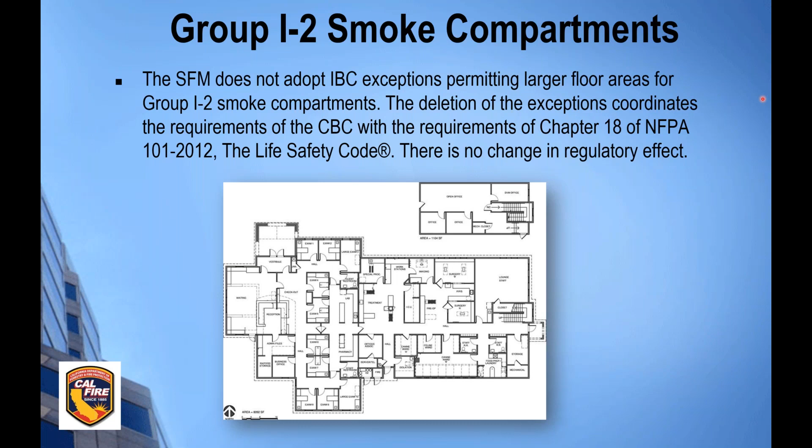There is language in the model code that allows smoke compartments to be larger than what NFPA 101 does and what we do. So we struck out model code language. Again, not new regulations. The smoke compartment sizes shall be not more than 22,500 square feet. So that hasn't changed. What changed was that model code changed it. So we did not adopt that language. We kept our language, 22,500 square feet.

And as you can see underneath the parts that are struck out, you'll see condition 2. Model code back in 2016 introduced condition 1 and condition 2 to I-2 occupancies. We did not adopt those conditions, and at that time we struck those out. The reason I'm bringing that up is because we've got a lot of publisher errors in the code this edition. When we struck out those conditions back in 2016, that's supposed to carry over to the 2019 edition. That didn't happen everywhere.

So as you're reading through the code, you may see condition 1 or condition 2 mentioned in a few places. We don't adopt those. An I-2 is an I-2. We don't have those conditions. So we're fixing that with our erratas, but you might still see it. But just as a heads up there, we don't adopt those conditions.

This is not a new section either, but it's been added to. So this section 407.2.6 is for nursing home cooking facilities. Back in 2016, Model Code allowed domestic cooking into nursing homes. So this is for SNFs only, and this is to make the SNF more home-like and have a place to help residents come out, get out of their rooms and visit with people.

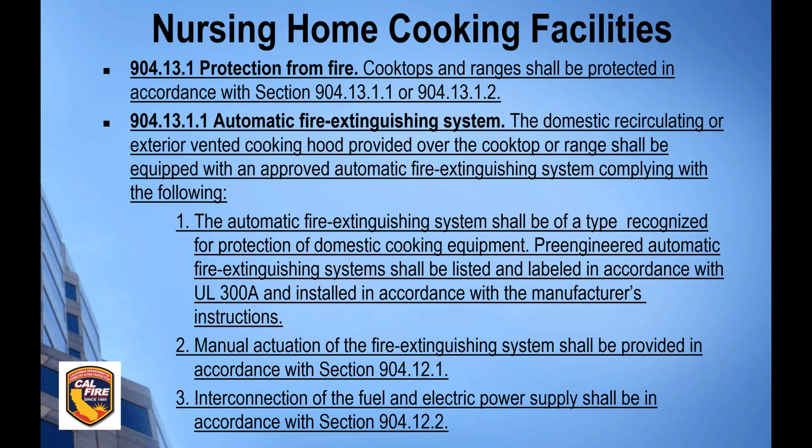And then 3, interconnection of the fuel and electrical power supply shall be in accordance with 904.12.2. So they need again, the fuel and power shut off. So this option is what they would use if they had a gas range. UL 300A is not equivalent to a UL 300 system. So if they have this domestic system, and it's gas, they have the UL 300A, the manual pull, shut off of fuel and electrical power. So again, 300A is not equivalent to UL 300.

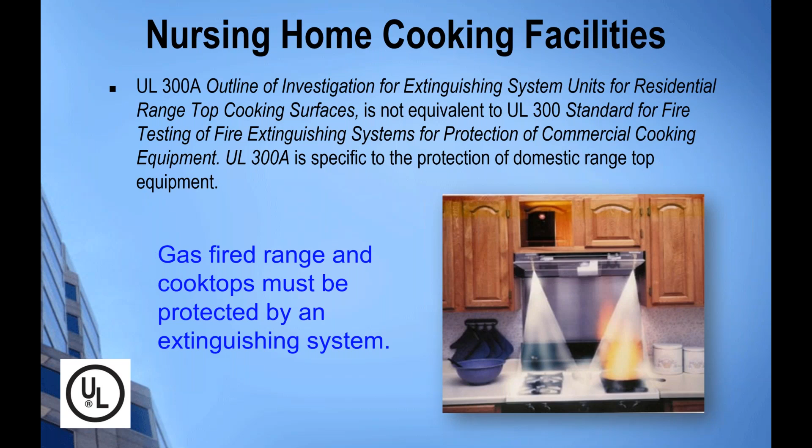And then the second option, 904.13.1.2, reads: cooktops and ranges shall include burners that have been tested and listed to prevent ignition of cooking oils with burners turned on to their max heat setting and allowed to operate for 30 minutes. So this is going to be for the electric ranges. Obviously, that test might be kind of fun, but they wouldn't pass very well if it was gas, right? You're turning up the burner to its max setting, allowing it to be that way for 30 minutes, and then putting oil on it.

So the electric ranges need this, and that test is UL 858. So they have to comply with UL 858. And as you can read here, as of April 2019, all electric ranges have to comply with this. So all the ranges sold after that have to comply with this requirement. So again, the gas ranges, UL 300A and the appropriate items that go with that, and the electric would have to meet this test requirement.

All right, new piece of a section in the code under smoke compartments, talking about independent egress. This section was added to make it clear that if a smoke compartment does not have an exit, then it shall be provided with direct access to not less than 2 adjacent smoke compartments. So there's your 3 main components of your means of egress, right? Your exit access, your exit, your exit discharge. An example of an exit would be an interior exit enclosure, like your stair. So if your smoke compartment does not have an actual exit, it needs access to 2 adjacent smoke compartments because you don't want a dead end smoke compartment.

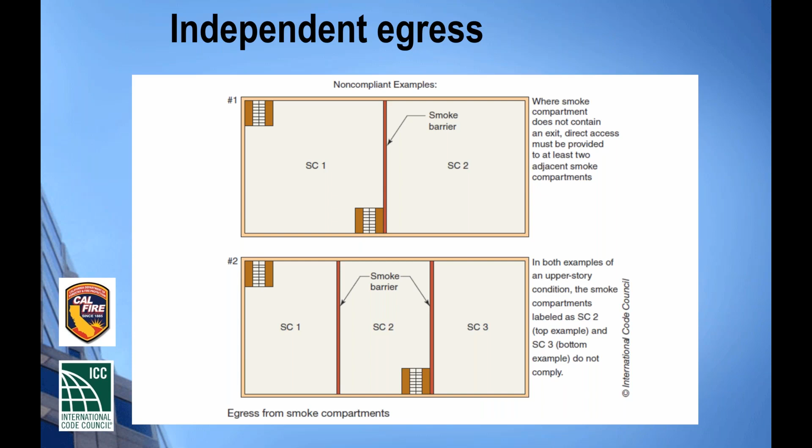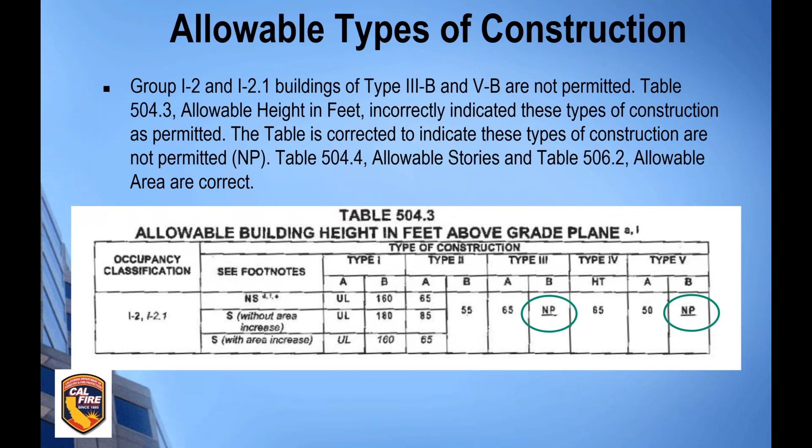This is another cleanup. Table 504.3 is the types of construction that you can have for the different occupancies. The 2016 publisher error did not put not permitted for type 3B and 5B construction, so we fixed that. So it was incorrect in the 2016. So again, this is corrected. It states that these types of construction are not permitted for I2 and I2.1 occupancies.

Accessory occupancies. 508 is a section that talks about mixed use and occupancies. And within the section, there's really 4 pieces, but 3 main pieces. You've got accessory spaces, separated spaces, and non-separated spaces. Non-separated spaces doesn't really happen with I2s because of the language in there that tells you it's either going to be separated or accessory. So some language that was changed in the accessory portion is cleaned up a little bit. So it's not new enforcement, it's just cleaned up.

So the charging section is going to tell you that no separation is required between accessories and the main occupancy. And then there are exceptions, and exception number 3 says, in group I2 and I2.1, those shall be separated from all other occupancies in accordance with 508.4. 508.4 is the section for separated occupancies. That's where you go to the table, you got an A and an I, you need 2 hours, separate it per that. Then this exception continues on. No separation is required between group B, E, R2 sleeping units, and S2 occupancies accessory to I2 and I2.1.

So what do you need in order to be considered accessory as opposed to separated? Accessory, you have 2 things: ancillary to the main use, it's related to the main use, and that type of use does not exceed 10% of the floor area, square footage of that floor.

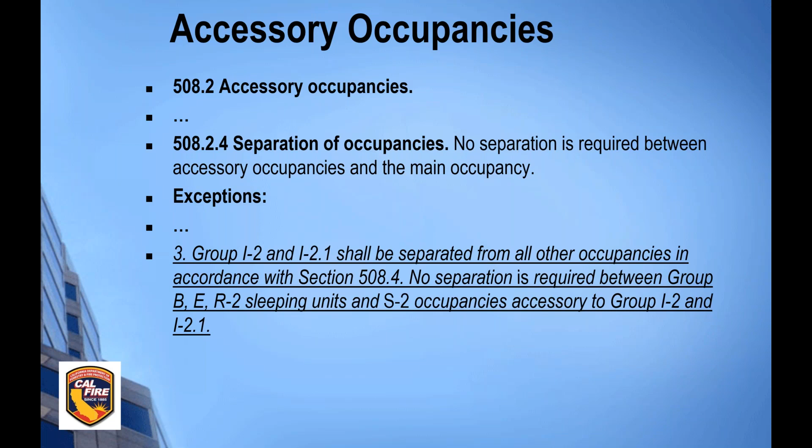You saw that an S2 was in there. Porte-cocheres are considered an S2. The S2 was intended for small storage closets, like a janitor's closet, a use such as that you'd see on the patient floor that wouldn't need to be separated. However, porte-cocheres are considered S2s, so it falls under that. We still use our CAN. We've got a CAN for porte-cocheres at this moment in time. Still use that CAN, but I am looking at changing that CAN to follow more in suit with this, as opposed to changing the code, because that was an unintended consequence of the change to this code.

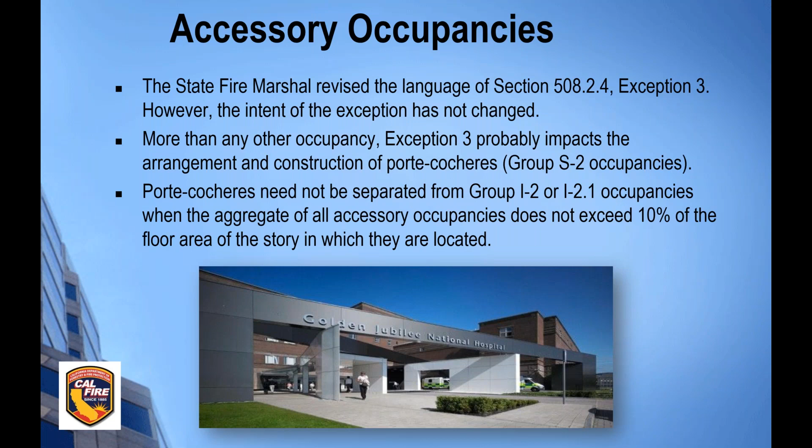So what we're looking at is when the porte-cochere is accessory to the I, what do we do with that? The CAN's going to tell you different scenarios. Is it used just for patient drop-off? Is it used for an ambulance, delivery trucks? And the conditions change with that. Excuse me. So I'll leave it at that. Otherwise, I'll be babbling too long about that. So use the CAN now. That hasn't changed. Still use the CAN for porte-cocheres, and I'll keep you posted if anything changes with that.

This section you really don't need, because it's talking about the non-separated occupancies. And like I mentioned before, for I2s, you're either going to fall under accessory or separated. But model code has language in 508.3.1.2 that leads you to believe you can use this. In California, you don't use it. We don't have condition 2. So when you have your mixed uses, you're either going to fall under the accessory space or separated. Or the fourth one that I hinted at, the incidental use, falls into play there. But non-separated, you're not going to use that.

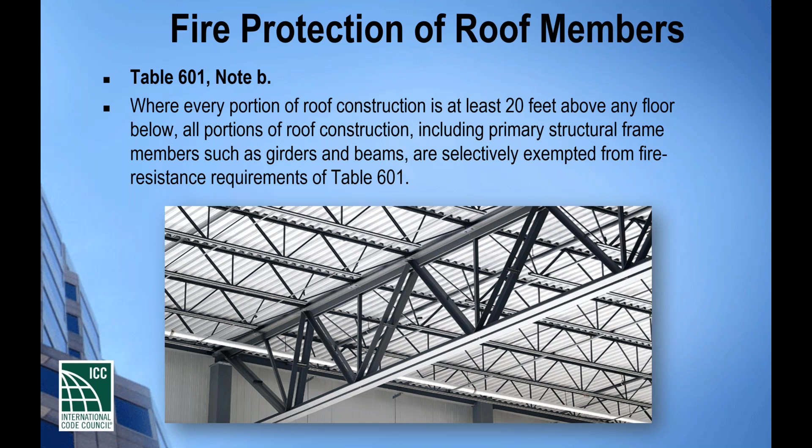601, table 601, note B. The intent, again, this is another cleanup. The enforcement of this has not changed. They just tried to make it clear that this is the footnote that talks about when the roof construction is 20 feet or more above any floor, then if the table tells you protection is needed, if you have this condition, this footnote says, except in these occupancies, you don't need to protect it. What they cleaned up was including primary structural frame members. Because before, when it's talking about roof framing and decking, it wasn't clear to some people that it also included the primary structural frame members that did not have to be protected.

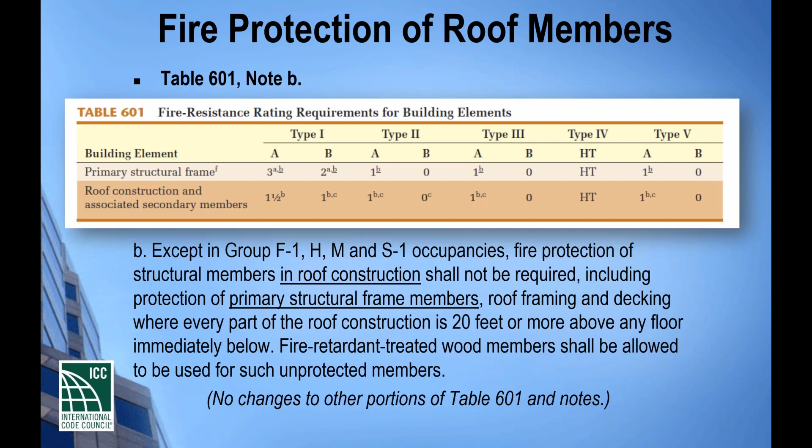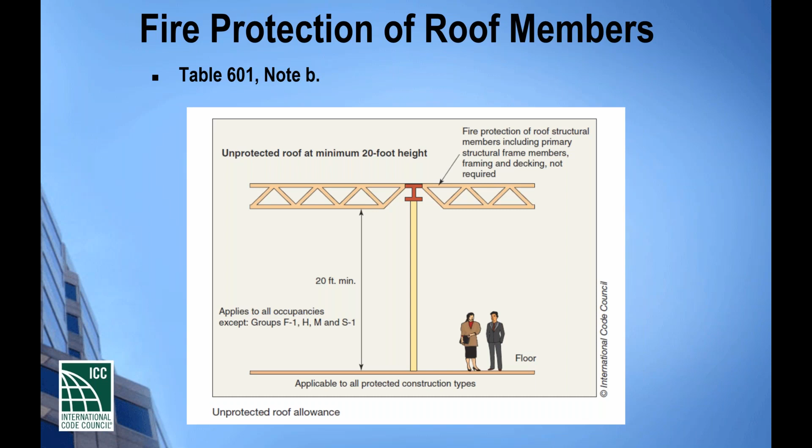But read through that carefully. So there's footnote B and footnote B1. So footnote B says except in F1, H, M, and S1 occupancies. So you don't get to use this exception for those. And then when you go to B1, oh, sorry, let me show you the picture first. So you've got the picture of the structural members. That footnote again is making it clear that those don't have to be protected when you have that condition.

And then the footnote B1 starts with, except in A, E, F1, H, I, L, M, R1, R2, R2.1, and S1 occupancies, and high rises, and then other SFM occupancies, you don't get to use that either. So really an easier way would have been to say, in B, F2, S2, and U occupancies, you can use this exception. So again, the enforcement hasn't changed. They just tried to make the language clearer, but there's so many occupancies that are exempted from it. You're just left with a few that can actually use that footnote.

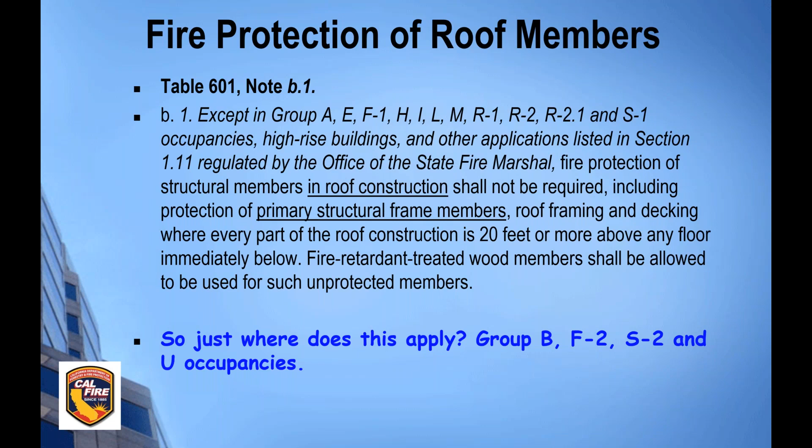All right, Chapter 7, 7 through 9, fire protection. Yay, fun stuff. So this section is new. The language is new, but what you've been doing has hopefully been in line with this section. It used to be one of those unwritten codes; well, now it's written. You've got secondary members attached to the primary structural members that need to be protected. How far out do you protect these? Well, now it's in code, 12 inches, but there's a couple more pieces to this.

So where primary and secondary structural steel members require fire protection, secondary attachments to those structural members shall be protected with the same fire-resistive material and thickness as required for the structural member. The protection shall extend away from the structural member a distance of not less than 12 inches, so protect it 12 inches out, or shall be applied to the entire length when the attachment is less than 12 inches long. Go figure. The attachment's less than 12 inches, protect the whole thing.

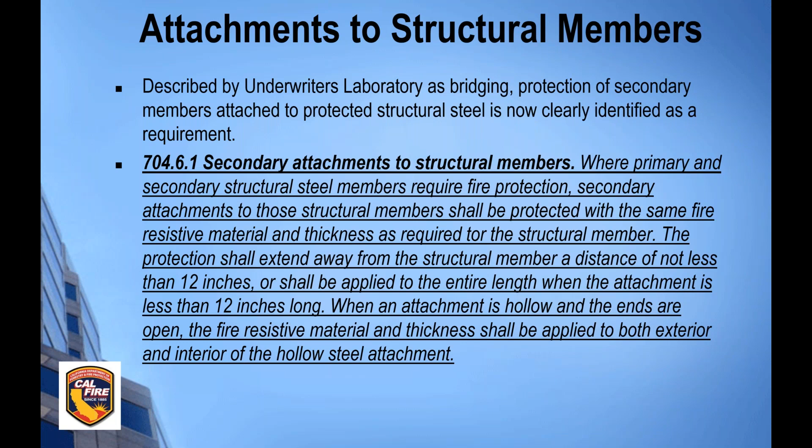And then the last part, when an attachment is hollow and the ends are open, the fire-resistive material and thickness shall be applied to both the exterior and interior of the hollow steel attachment. Makes sense, right? If you've got a hollow member attached to structural members that have to be fire protected, you essentially have a little chimney in there, a little space to transmit the heat to. So when it's hollow and both ends are open, the interior and the exterior both have to be protected in the same manner and thickness as the structural member. There's a visual for you.

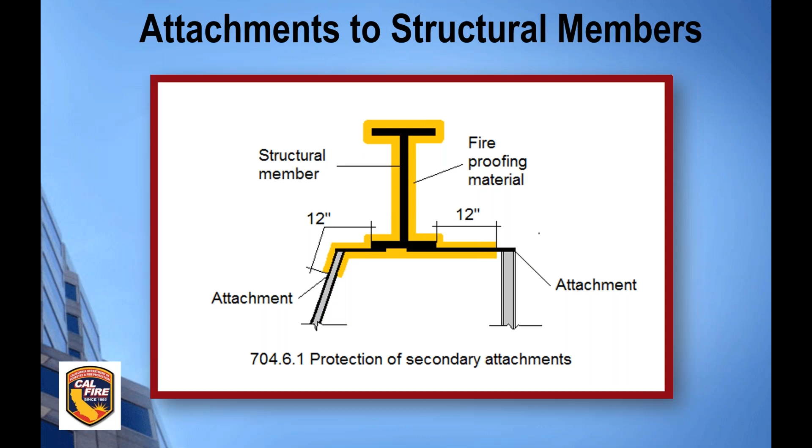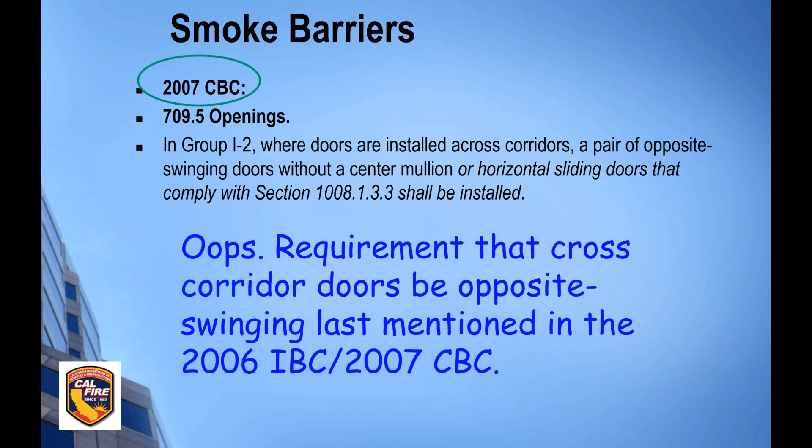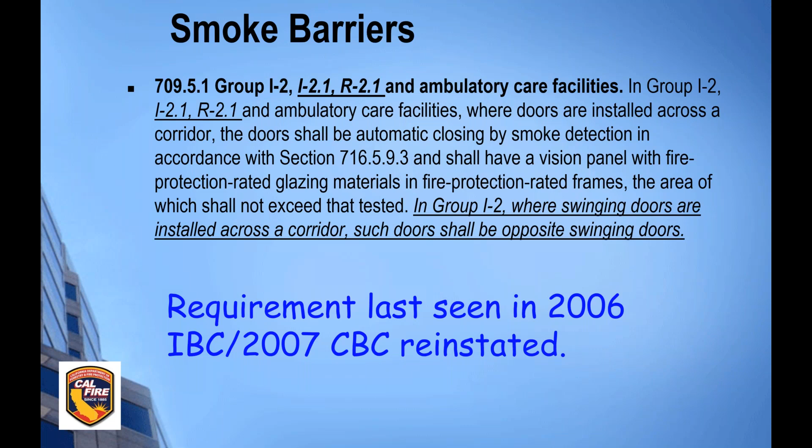So the charging section has not changed. What we've added again is, in group I2, where swinging doors are installed across the corridor, such doors shall be opposite swinging doors. Again, not new, just put back. It disappeared somewhere.

This section of 716.5.3, this again is not new enforcement. It's just language to make it clear that when you have, why don't we read it? 716.5.3: Fire door assemblies required to have a minimum fire protection rating of 20 minutes where located in corridor walls or smoke barrier walls having a fire resistance rating in accordance with Table 716.1(2) shall be tested in accordance with NFPA 252 or UL 10C without the hose stream test.

So there's an exception. So what that charging section is saying is when you have a rated corridor for the fire partition or a smoke barrier, the door has to be 20 minutes. And then there's an exception that ties you back into 407.3.1. Corridor door assemblies in occupancies of Group I-2 and I-2.1 in fully sprinklered buildings shall be in accordance with 407.3.1. So again, this is not new for enforcement.

So the charging section says your doors have to be rated when they're in a rated corridor. But then in 407.3.1, it says certain doors in the corridor don't have to be rated, like your patient room doors and certain offices. What some people have been missing for the years that it's been in there is that is only okay if the entire building is fully sprinklered.

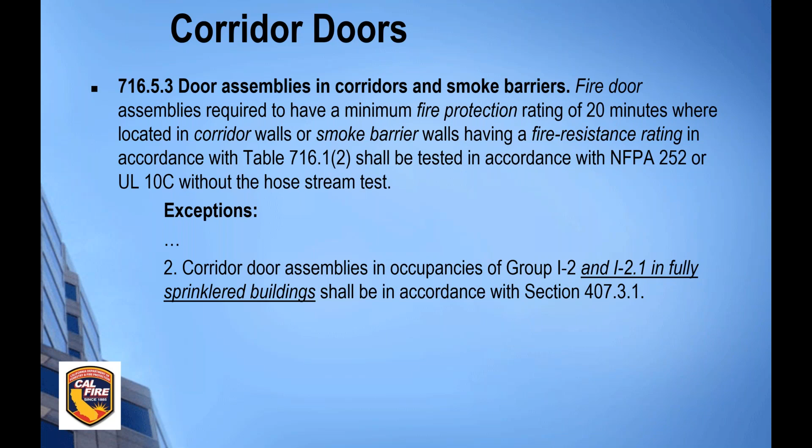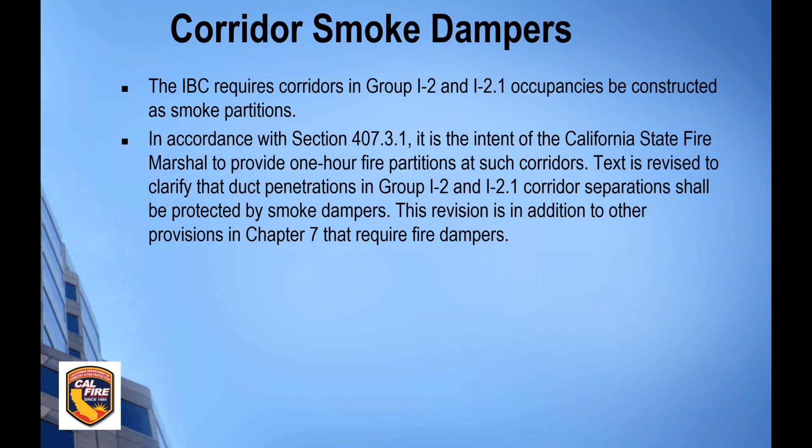Another, on the line of corridors and dampers, if you've been around for a while, you've probably had fun figuring out what in the world Chapter 7 is talking about when it comes to fire dampers and smoke dampers. And it's changed and it's been cleaned up and changed and cleaned up. So here's another change for you. I want to keep up with the times. So historically what happened is the model code took away ratings for corridors in I-2s. California did not adopt that. We kept our corridors rated, but what happened in the process was some disconnect with the code on dampers and which kind of dampers are required.

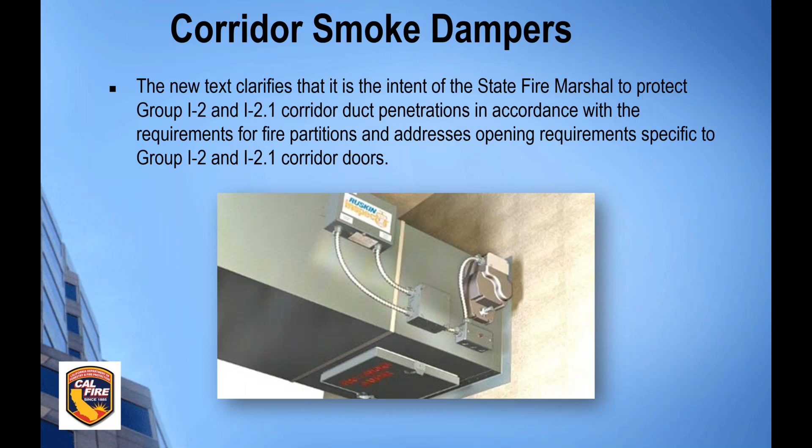So the section that I'm talking about now, 717.5.4.1, is talking about smoke dampers in corridors that are rated. You have another section that's going to talk about where fire dampers are. That stayed the same. So what has changed is this language here: for A, E, H, I, L, and R occupancies, high-rise buildings, and other SFM facilities, a listed smoke damper designed to resist the passage of smoke shall also be provided at each point a duct or air transfer opening penetrates a fire resistance rated corridor required to have smoke and draft control doors in accordance with 716.2.2.1. So that main part didn't change.

So if you're in a rated corridor and within that corridor are doors that are required to be smoke and draft control doors, then smoke dampers were needed in the ducts that penetrate that corridor. What was added is this last part: doors that provide an effective barrier to limit the transfer of smoke in accordance with 407.3.1. So what is that saying? That section we just talked about said if your I-2 is fully sprinklered and you have patient room doors that are not rated, they are required to limit the transfer of smoke. This section is about those types of doors.

So when you have a corridor where those types of doors are required, this is saying you need a smoke damper. But don't freak out. It's okay. The exceptions are still there: unless there's no opening to the corridor, and if the thickness of the duct steel is not less than 0.019. So this is saying you need those smoke dampers. If there are openings in the corridor, you still need fire smoke dampers. And if that steel thickness is not as indicated in the code, you would need the smoke damper in addition to the fire damper, so fire smoke dampers. Hopefully that's clear.

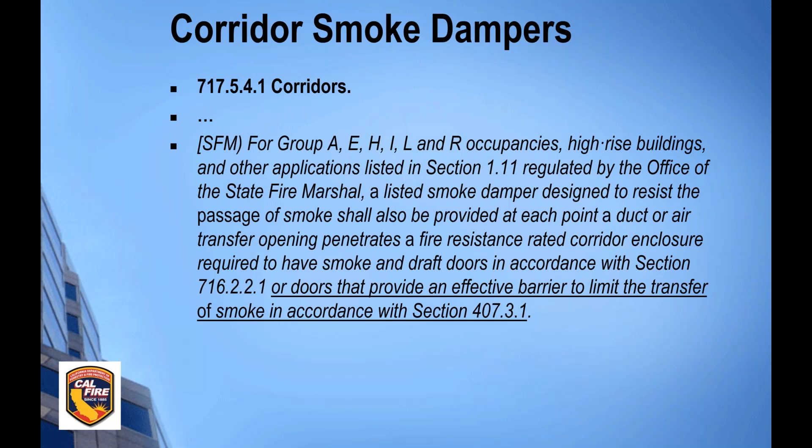You've heard us talking the past couple of years about changes in interior floor finish for areas where patients are restrained.

The old code, and the Life Safety Code, used to say only non-combustible flooring was permitted. Changes in 804 have been made to lead you to see that there's more. You can use other flooring.

The charging section says that interior floor finish and floor coverings, for all occupancies, shall comply with 804.2 to 804.4.2. But then there's an exception: in areas except groups I-2 with detention and I-3s, the floor finishes and coverings of a traditional type, such as wood, vinyl, linoleum, or terrazzo, and resilient floor covering materials that are not comprised of fibers.

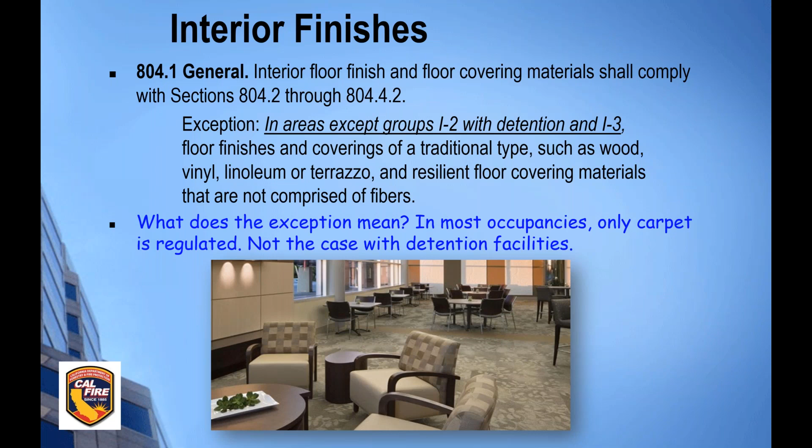What did that just say? It says in most occupancies, only the carpet is regulated, and the following sections will say how that carpet has to be tested and regulated. This is one of them, the test requirements for that. That hasn't changed. At the very end, it tells you to go see 804.4.3 when you're dealing with the flooring in the I-2 with restraint or the I-3s.

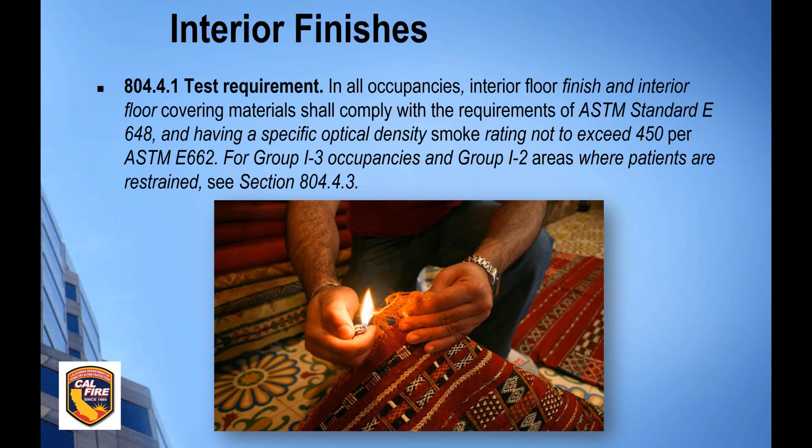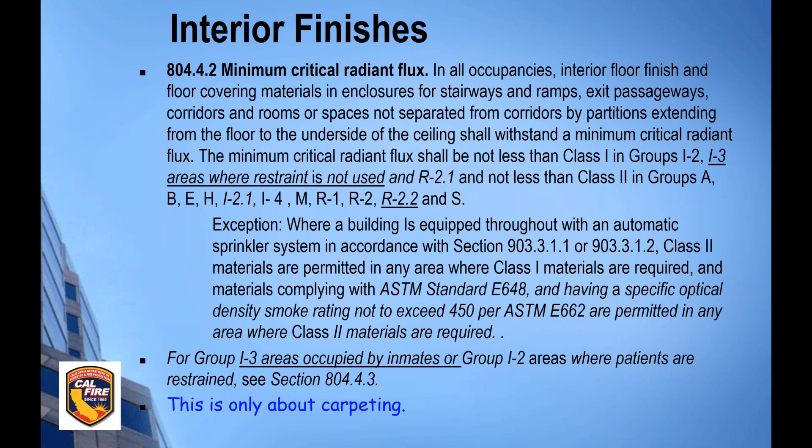So when you finally get there, the wording probably looks familiar to you. We just kind of shuffled it up a little bit to make the charging section the allowance, the exception. So interior floor finish and floor coverings occupied by inmates or patients whose personal liberties are restrained shall be non-combustible. The charging section says the flooring is non-combustible, but the exception: carpet or other floor covering materials may be used in areas protected by an automatic sprinkler system installed throughout.

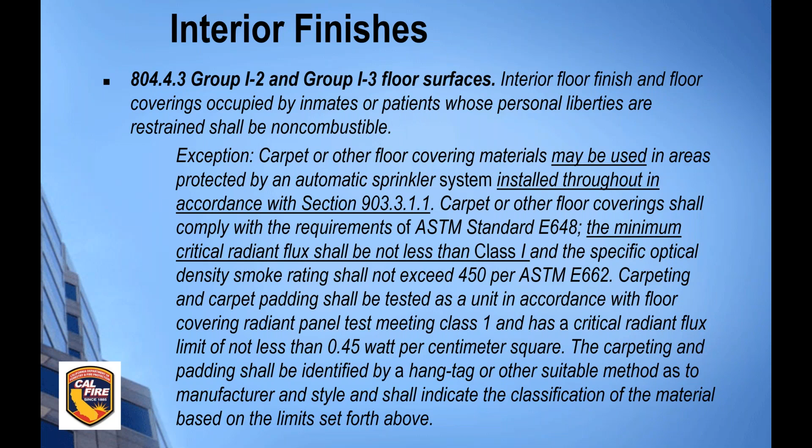Carpet or other floor covering shall comply with the requirements of ASTM E648, and the minimum critical radiant flux shall be not less than Class 1, plus the rest of the requirements. So what this is saying is that if the building is not fully sprinklered, you still have to have non-combustible flooring. If the building is fully sprinklered, which it has to be if you're going to have locked people in it, you can have not less than Class 1 critical radiant flux flooring. So it gives you an option of not just non-combustible, but you can use this other flooring as long as it meets all of these requirements and it's not less than Class 1 critical radiant flux.

For the fire alarm section of the code, we added an exception to 907.5.1. That charging section indicates pre-signal features are allowed when approved by the building code official. We have an exception to that, basically telling you we don't allow that. A pre-signal feature shall not be permitted to be installed in a group I-2, I-2.1, or R-2.1 occupancy. So you cannot have a pre-signal device in the I-2.

And what is a pre-signal device? It alerts someone else before alerting the occupants of the building, and an individual will have to go see what's happening and then activate the alarm if required. So we do not allow that, and you can think about this section when you're looking at the supervisories for duct detectors. We do not allow duct detectors to go to supervisory. Duct detectors have to be in alarm condition. This is one of those sections used for that.

We are changing the code to make that clearer, because there are sections of code that say duct detectors can be supervisory. We're changing that to make it clear that no, we don't, and it's a timing thing. If that duct detector goes off, somebody's got to pre-signal, right? Somebody's got to go check, see is it valid, and then go activate the alarm. Too much time has gone by where, if it is real, patients should have already been starting to relocate. So we do not allow that.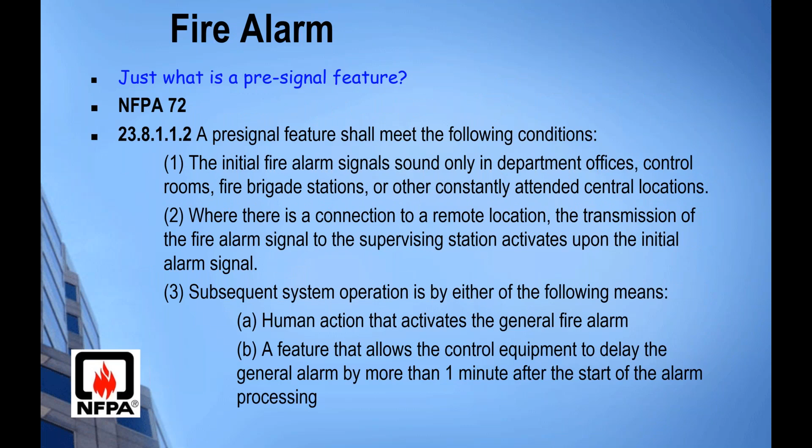This section is somehow everywhere. I just brought up the duct detector because that's been part of my world a lot lately, so I'm just sharing that with you. A little bit of language has changed, or again been made a little clearer, about emergency voice communication systems for fire alarms.

In high-rise buildings and in I2 occupancies that have occupied floors more than 75 feet above the lowest level of fire department vehicle access, section 907-213 requires an emergency voice alarm communication system. So that isn't new, but what we've done is coordinated different sections. So 907-522, coordinate that with 907-213. What is that all saying?

Let me go down here. That part hasn't changed. So when you have an I2, your audible alarms, or audible appliances, shall be used in non-patient areas, right? And then there's this exception that says when you don't use those audibles, a visual alarm is provided, and visual appliances are allowed to be used in lieu of audible appliances in patient-occupied areas.

So what this section is saying is when you use those visuals instead of the audibles, the emergency voice communication system has to be activated to tell the other occupants in the building. This has been, as I've read, for the high-rise I2s, but now it's coordinating it so it's in any I2. So in group I2 and I-2.1 occupancies where, in accordance with 907525, audible fire alarm notification devices are not provided, where the visuals are provided in lieu of the audible, upon receipt of an alarm at a constantly attended location, a general occupant notification shall be broadcast over the public address system.

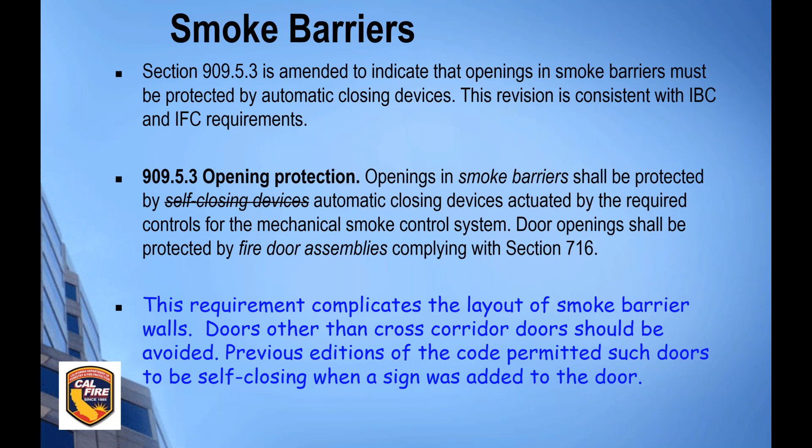This is just coordinating with the section I already read about 70951, where you have cross corridor doors in the smoke barrier. They have to be opposite swinging. There's a section in the fire code that wasn't in place, and a section they flip-flopped. One section was in place in the building code, but both sections weren't in place in both codes. So what we did was just clean that up so it's coordinated now. In 70951 it says if they're cross corridors opposite, they have to be opposite swinging, and then 909531 just matches that requirement.

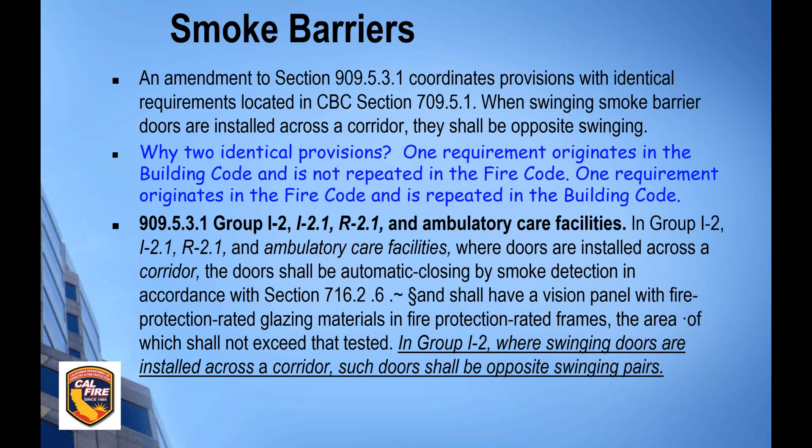And means of egress, Chapter 10. This is part of that cleanup we talked about with Chapter 4, about when you need two means of egress. Table 100621 tells you, based on occupant load and common path of travel, when two means of egress are needed. This exception number 2 makes it clear that for rooms and care suites, go to 407-4 because there are more specific requirements there. Also footnote D in that same section, 100621, tells you to go to 407-4 for travel distance limitations and the number of exits and exit access requirements. So make sure that for those types of areas, you go to 407. It's more specific over there.

This section is another one that, for years, is for those of you who deal with CMS and 101, and the back and forth of about 15 years ago, do you need to illuminate your exit discharge through the public way or not? They went back and forth for a while, then put it in the code.

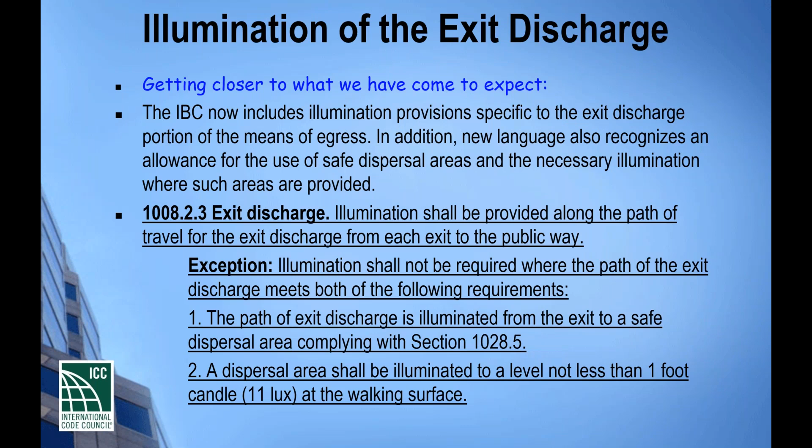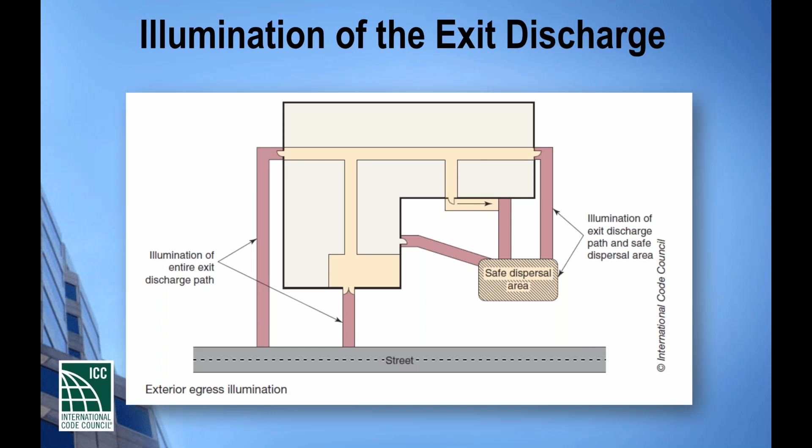Now we have it in the code so that your illumination for your exiting has to be lit up through to the public way. Or, as this section says, if they don't go to a public way, they go to a safe dispersal area, then it goes through to that safe dispersal area. So again, means of egress lighting has to be lit from the exit discharge through to the public way or to this safe dispersal area. And if it goes to the safe dispersal area, the illumination there is not less than 1 foot candle. So there's what it looks like from your exit discharge, your exterior exit door, all the way through to the public way. It has to be lit up.

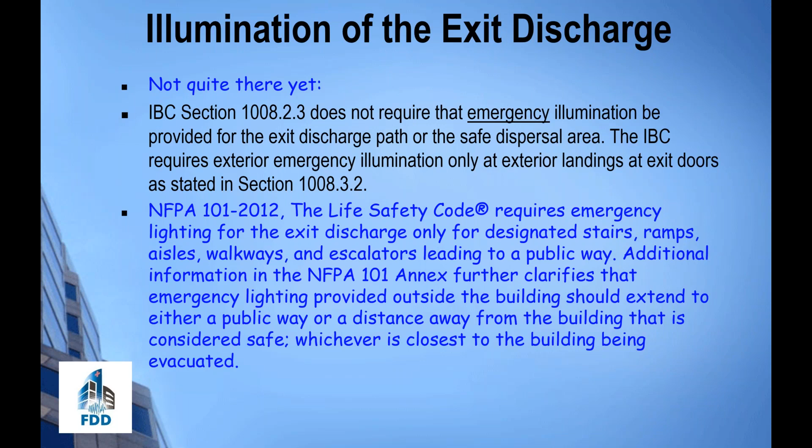And then it's also on emergency power. Model code didn't have that; we added that. When you're required to have that lighting, that lighting is required to be tied to the emergency power.

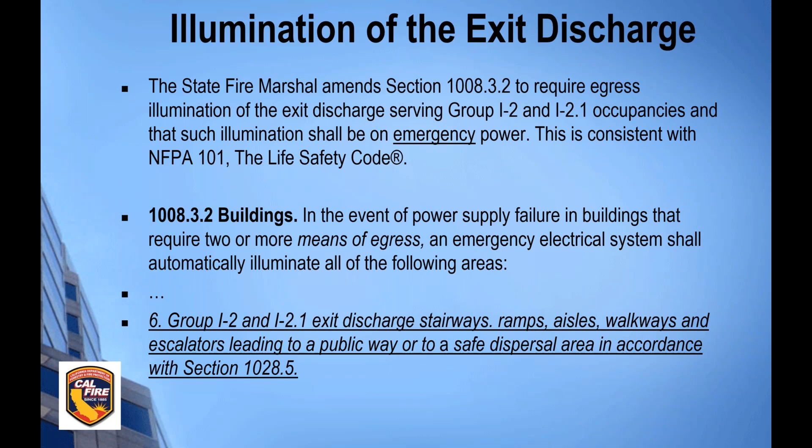So be careful with the types of lighting used outside. You've got 10 seconds from the power outage till the generator kicks in, and that lighting has to be at the minimum allowed at that 10 seconds. So if you've got lighting that slowly ramps up to full brightness and it takes 10 minutes, half an hour, whatever, that won't comply.

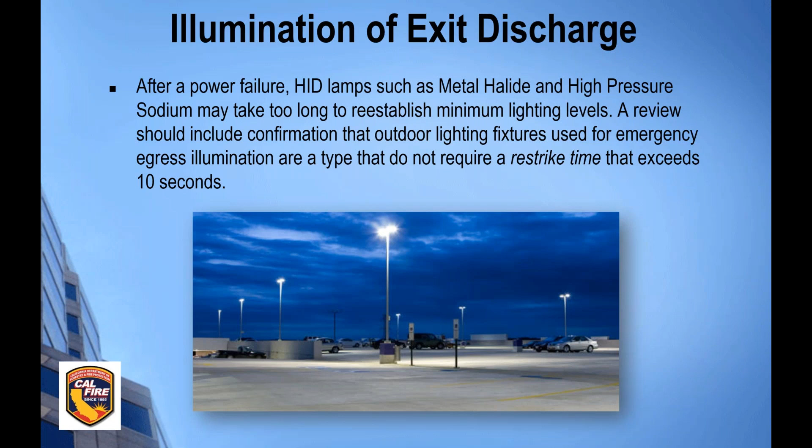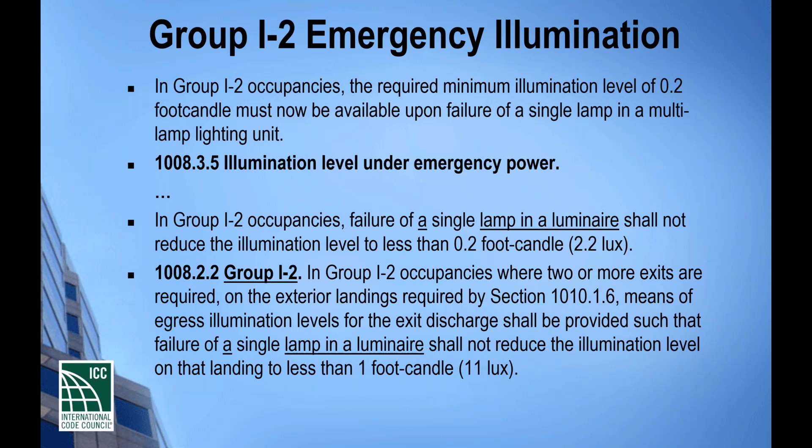Just a visual for you - again, if one fails, the other still has to provide the minimum.

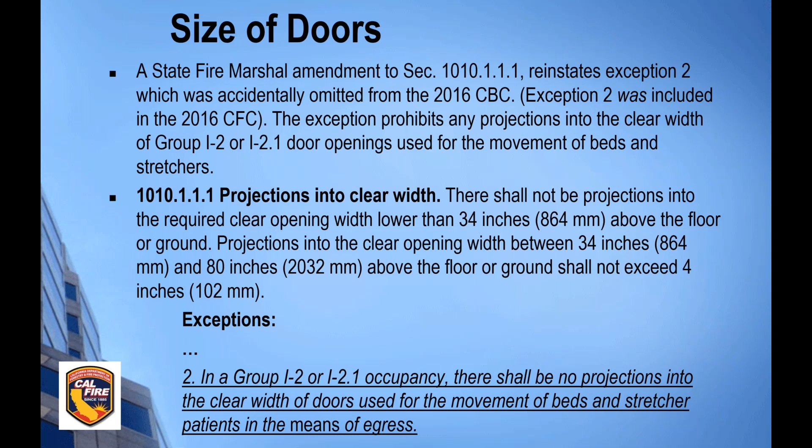Size of doors, another cleanup code section. Model code allows projections on certain doors. We have an exception that in a group I-2 occupancy, there shall be no projections into the clear width of doors used for the movement of beds and stretcher patients in the means of egress. So the charging section says you can have these projections between 34 and 80 inches. The exception says no, not in I-2 for the doors used for beds and stretchers - you have the 44 clear, so no projections. Usually that's where your hardware comes into play.

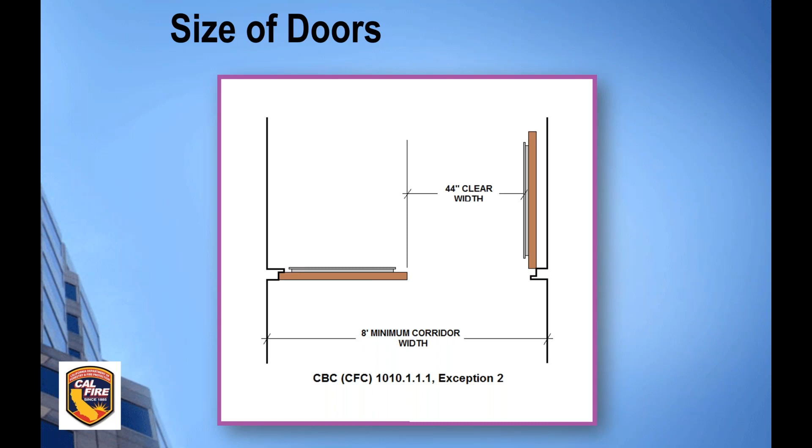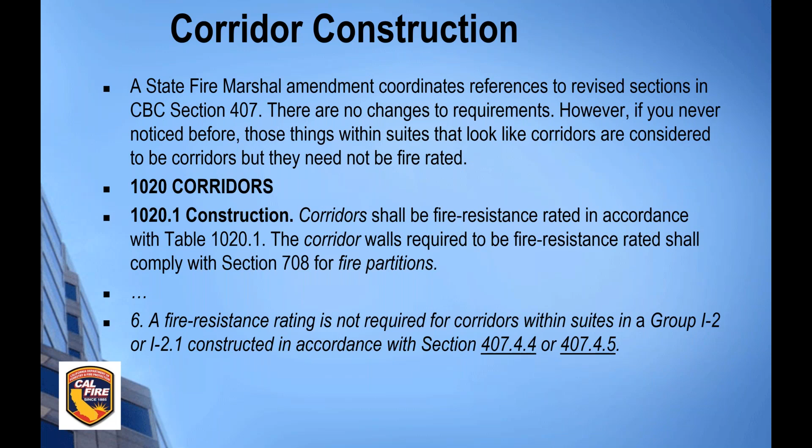Corridor construction - this is just one of those sections apparently needed to make the obvious more obvious. This section, 1020.1, tells you that corridors shall be fire resistance rated in accordance with table 1020.1. Well, in suites, we call those spaces that look like corridors, corridors. But what number 6 is telling you is that in areas where the suite is protected as it's supposed to be, with the fire barrier around the suite, the corridor within that suite doesn't need a rating.

Here, you know what it looks like - that's just making it clear that when you have a corridor within the suite, that corridor does not have to be rated. And that was some confusion, because when the old code language changed with all the different aisles, hallways and corridors, what do we call it when it's in a suite? We call it a corridor - a non-rated corridor, in the suite.

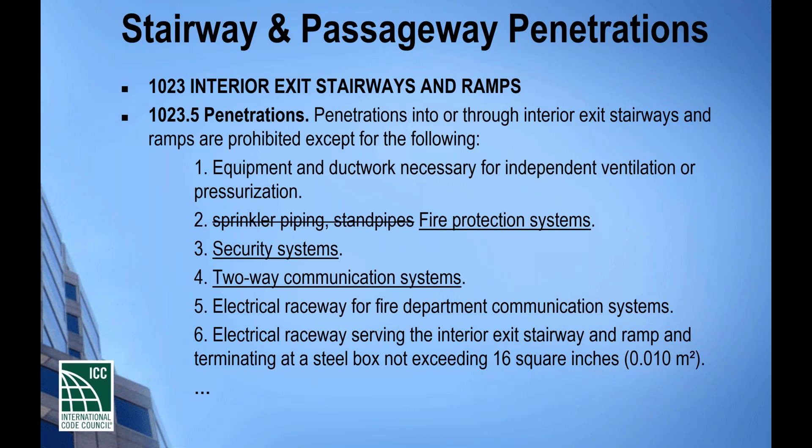It doesn't need to come in on every single floor. It can come in on one floor, go up a few, and then bring in another one. It doesn't need to come in and out on every floor. You want to limit the number of penetrations there.

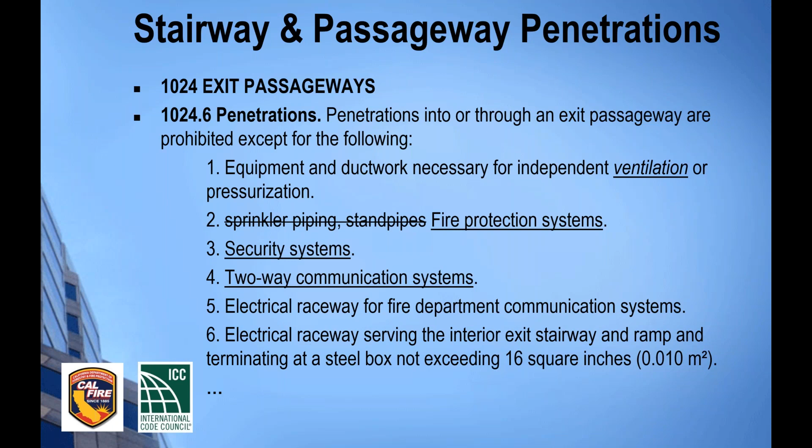1024.6 is the matching section of what we just read, but for exit passageways. So the language here was changed to match that. So those same penetrations that are permitted in an interior exit stair are permitted in an exit passageway with the same intent in mind. So what's it telling you? It's okay now to have the cameras and then the penetrations for the two-way communication.

But again, keep the intent in mind. Limit the number of penetrations. Come in on the floor, go up, and then I know there are requirements with how much wiring you can have from an electrical room to the source. So use it to the maximum there.

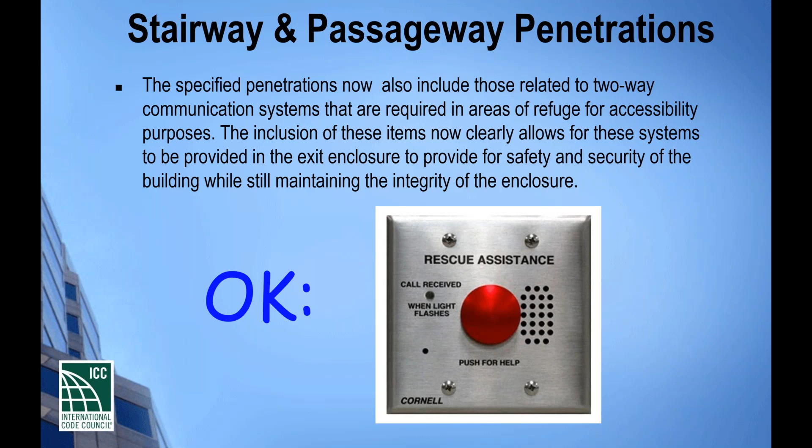All right. Building services, special devices, and special conditions. We're mainly going to talk about elevators in here. And sorry, my hesitation. I'm trying to decide how long I go into this one.

So there's some confusion, and there has been some confusion with elevators and when sprinklers are required, when they're not required, when can you take them out. So in today's code, right now, as it's written with no changes, sprinklers are required in the hoistways in I2s because of section 903.2.6. 903.2.6 is the section that indicates I2s have to be fully sprinklered. That's the section that's the most stringent of all the others.

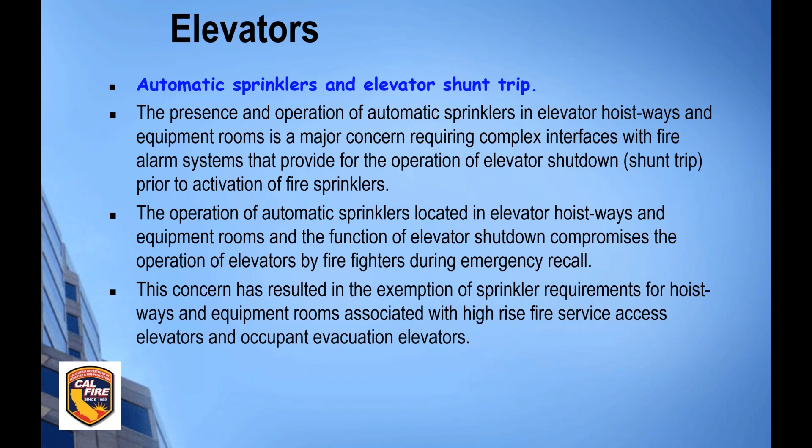So you'll see in 903.3.1.1.1 that section says you can take out sprinklers in certain areas, but it starts with in other than I2, 2.1, and I3. So you're back to 903.2.6 where sprinklers are required in I2s. And then you say, well, wait a minute, what about chapter 30 and 3005? That says I can take my sprinklers out if I put these other items in place. Kind of. State Fire Marshal's cleaning that section up.

That section was intended for machineless room elevators. So the elevators where the machine is on that cab or in that same hoistway as the elevator, where it doesn't have a separate machinery room. Similar to like the Gen 2 type elevator. So you've got that machinery right in the hoistway. That section was meant for those types of elevators because of the machinery for those types of elevators.

It's mainly non-combustible, but there are still some pieces that, even if they're non-combustible, the smoke development of, like, the belts, for example, is high. So their intent was when you have those types of elevators, you could take the sprinkler out if you put these other 6 items into place. So again, that section 30 is used for just those machineless room type elevators. That's when you have that section.

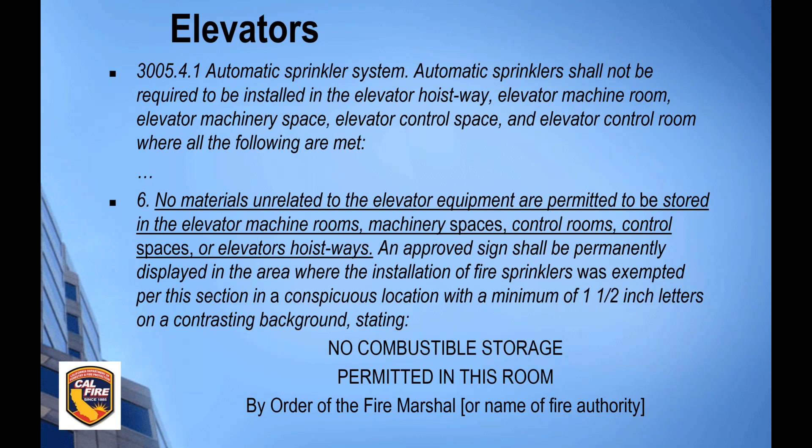3005.4.1, the section that's talking about the elevators, the machineless room elevators, they added in here, no materials unrelated to the elevator equipment are permitted to be stored in the elevator machine rooms, machinery spaces, control rooms, and control spaces, or elevator hoistways. What that's saying is if you have the machineless room type elevators and you're taking the sprinkler out and you're complying with those 6 other items instead, part of those 6 items is no storage is permitted in those spaces unless it's related to the elevator.

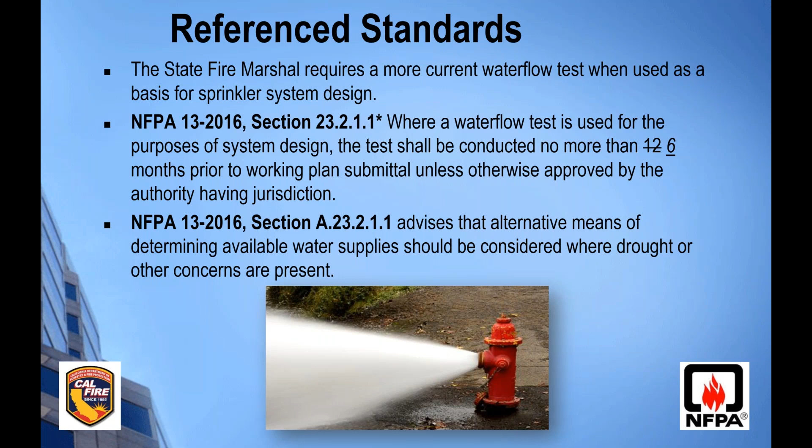And then reference standards, chapter 35, a couple amendments that we made to NFPA 13 regarding water flow. We require a more current water flow test. NFPA 13 says that water flow test shall be conducted no more than 12 months prior to the plan submittal. We have amended that to 6. So we need that to 6. And then the explanatory material indicates that an alternative means of determining the water supply should be considered when there's a drought or other concerns are present.

And then amendments to 72, to 23.8.1.2.1.1. Again, making it clear that the positive alarm sequence, the pre-signal type, is not permitted in the patient sleeping room. So operation of a patient room smoke detector in I-2 and R-2.1 occupancy shall not include a positive alarm sequence feature. If smoke's detected, alarm goes off. It doesn't check what kind of smoke.

So a couple items you might have seen, even right here. It says NFPA 72 2016. Why do we adopt that edition? Why don't we have 19? It has to do with when our codes are ready and when the reference standards are ready for print. So the NFPA standards at the time we were writing for 2019 were not approved and ready for print, so we couldn't adopt those next editions. So that's why we're in the 16 editions, not for all of the reference standards, but a chunk of them.

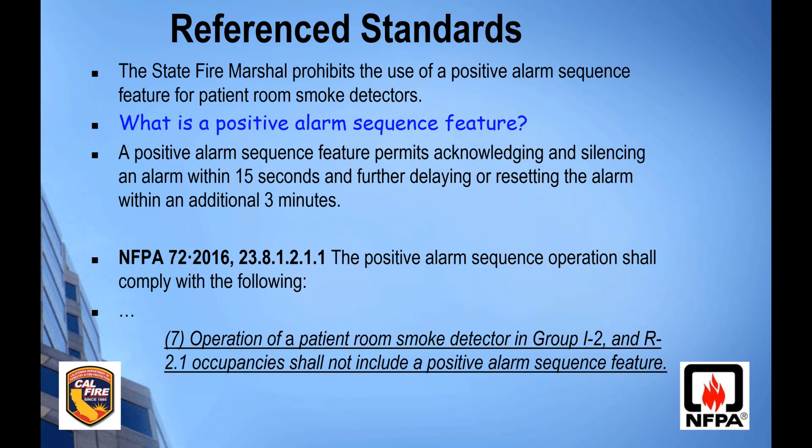So make sure that when you're looking at the reference standards, look in chapter 35, look in chapter 80 of the fire code, make sure you're using the right edition of the reference standard. With that, we will go to questions, and Caesar will be reading these questions.

All right. So thank you for that, Nancy. That was a very informative presentation. But with that being said, we have some questions for you. I hope you're ready to answer; some of these are tricky, but we'll try to keep them as general as possible. First question, if you're ready, is are the suite requirements for surgery and radiology the same as ICUs?

Suite requirements for, so fire-wise, I'm not sure which requirements you mean, but fire-wise, you're going to need the 1 hour fire barrier around the suite. Oh, you know what, there's a code talking about the size of the suites. The size of the suites is, you've got sleeping suites, non-sleeping suites. You've got those size requirements. Those are all the same, so I'm not certain which you're referring to, but that does bring up a good point.

407.4.4.5.1 is broken, and that should be fixed in an errata. Your care suites are limited. The charging section in the written code says 7,500 square feet. That was a misprint, publisher's error. That should say 5,000 square feet. And then exception 1, when the building is sprinklered, the care suite can be 7,500. And then exception 2, when it's fully sprinklered and it's fully smoke detected throughout, it can have 10,000 square feet.